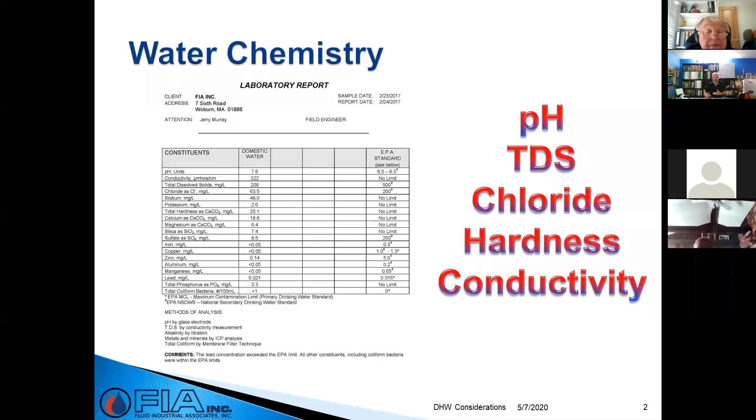Let's talk about a couple of things. So pH, we talk about pH all the time, but it's really about where we are - are we alkaline, are we acidic in our water, or are we neutral? On the heating side of things, the condensing boiler world, we're probably exposed a little more to pH because that's what we're talking about in our condensate neutralization kits. But it really talks about - high pH gives a bitter taste to the water.

That's when the EPA might say, hey, the customer's not going to be happy, the end user. And then you get buildup on your stuff. Low pH, now we can corrode and dissolve metals and other substances. What can make pH low?

Most common in heating side applications, when we see low pH, that's really degraded glycol. Obviously, because we're talking potable water today, we don't see that. Most pH is balanced really by the different water companies because they don't want high and low pH in their water pipes, so they do a pretty good job of monitoring where the pH level is. We generally like to be in that range of 7 to 8.5, maybe 7 to 9 range is where we want to keep that pH. If we cross 9, we're going to start seeing buildup. Drop below 7, we're going to start to corrode and damage our pipes. So that's pH.

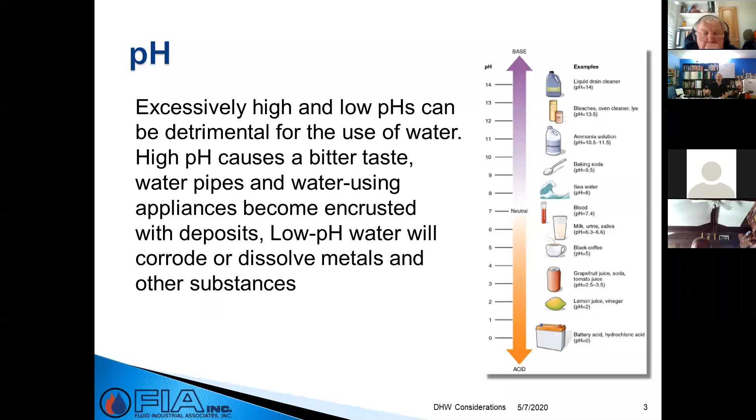Total dissolved solids, junk in your water - it's literally what it is. It is stuff that's floating around in our water, dissolved into the solution. Here's the thing that's always a weird one - we all go out and get mineral water, right? Well, maybe not all of us, but people like to drink mineral water, and that's really what that is. It notes that it's not heavy metal contamination, so we're not looking at any of those sort of things that are really harmful - the arsenics, the lead, the iron. We're just looking at different things - this could be zinc, this could be sand or dirt in the water even, any of that kind of stuff there.

Now, what that really contributes to is corrosion and scale deposits. You've got a little picture right there at the bottom. We're up in the yellow area for the most part of the New England area. So it's not bad, it's not great, but the thing about dissolved solids is when you heat water, those begin to precipitate out of solution. And then they're going to end up on the pipes.

Most dissolved solids are actually easy to take out utilizing some sort of filtration system, just a typical spun whole house type of filter. That's going to take care of your dissolved solids. So that's what those are.

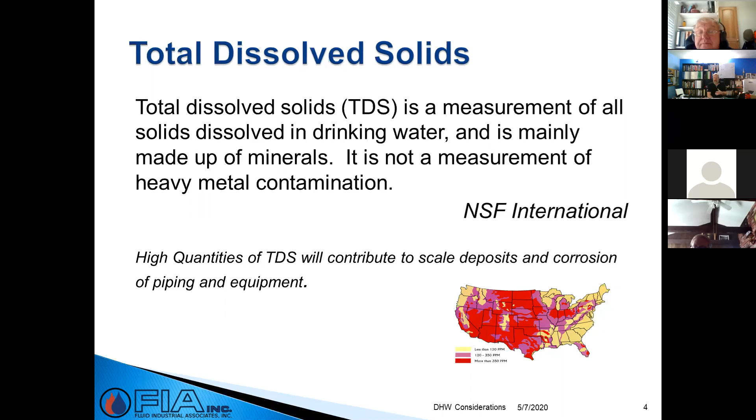Chlorides. Who knows what chlorides is? It's salt. Salt makes water more corrosive. Of course, road salt corrodes our cars. Salt is a corrosive mineral, and stainless steel doesn't like chlorides, and copper doesn't like chlorides, and those are basically what we heat with. We use those two products as a general rule.

Now here in New England, we have a lot of chlorides in our water, which is also, how do you soften water? With salt, right? We've got a water softener down there. We're going to use chlorides to soften our water. We're naturally softening the water here in New England, basically with the road salt runoff and things like that. So for heating equipment, 150 parts per million - you definitely want to have that salt content below where that is.

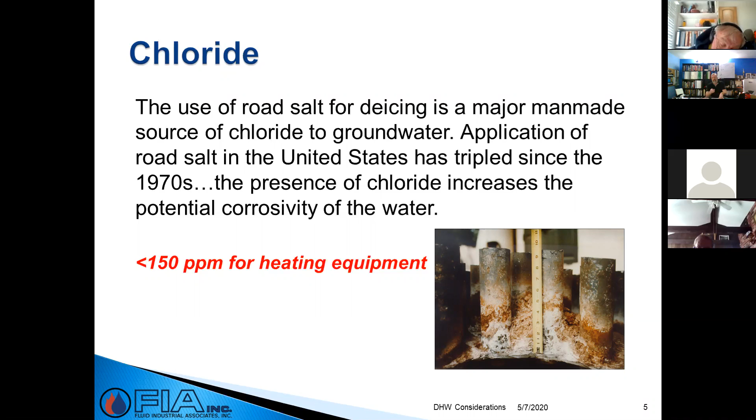So that dovetails our way right into hardness. And what is hardness? Interesting - I always thought everybody's got hard water. It's all I hear: hard water, hard water, you need to get a water softener. And then the reality is, in our area here, our water is soft. We're generally, in most places, in that too-soft area. You may see this referred to as grains per gallon or milligrams per liter - it really depends on how it's termed. That 85.5 milligrams per liter works out to about 5 grains per gallon. Coming up, I've got another slide with a little picture on there, and our whole area is in that too-soft water area.

So when water is too soft, here's what can happen: I am sucking the minerals out of the piping within the system piping. I'm going to pick that up as I'm traveling through, as the water is moving through it. It's kind of going to leach those minerals out, and it's going to carry them with it. That's kind of the thing that soft water does as it moves through and along. And water is an incredible corrosive material.

I mean, it's what it's great at - made the Grand Canyon, right? Worked its way through, wore its way down. Generally, what water is going to do - it used to do a good job of balancing itself as it moved through the water table. It was collecting minerals and doing that sort of thing, and it just got to its natural equilibrium. And then we get involved and we do all kinds of different things to our water, depending on what's going on.

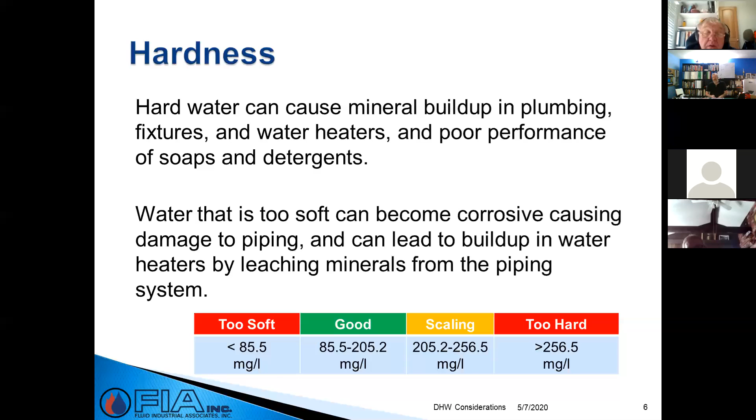That's hardness. Now conductivity, this one's getting way out there in the world of science nerdiness, so let's do some Bill Nye experiments. Conductivity is really kind of the mineral content, if you will, of the water.

Some of the mineral content in there can actually create an electrical current through different dissimilar metals with high conductivity in water, and basically we get that galvanic corrosion or electrolysis. That's going to attack joints, solder, those sort of things. It's going to get your solder joints, it's going to get all those types of things - that's really what's happening when we have that.

What's a solution for conductivity? A filter, because again, you're just filtering out minerals. We're not trying to pull out lead and those sort of things.

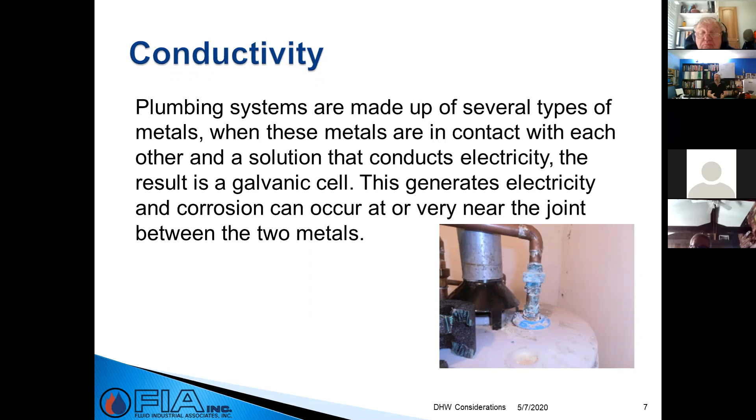And back to the soft water - that's what really created the lead issue, is the soft water moving through lead pipes, leaching lead into the water, and then making its way into the house. So that's how that was picking it up. We all understand why we can't have lead pipes anymore, we can't have lead fittings, because the water was pulling the lead out of the fittings in the pipe. It's no different - we're not pulling lead out. People don't care because it's not a health issue, but it's certainly a health issue for our heating equipment.

So, recirculation pumps. And while this seems like kind of a meandering through the woods, it's all going to tie in here. If I pass my water through my heater and I heat it up and do its thing and off it goes into the system, yeah, I'm going to chase around some of the issues - the hard water, pH, that sort of stuff.

But this is where soft water can really come into play. Now that soft water, as I recirculate it through my building, what's it doing? It's picking up all the minerals throughout the building, and then it comes back and deposits them in my water heating equipment, puts them on the surface of that, and that begins to cause that buildup on those surfaces and can lead to issues.

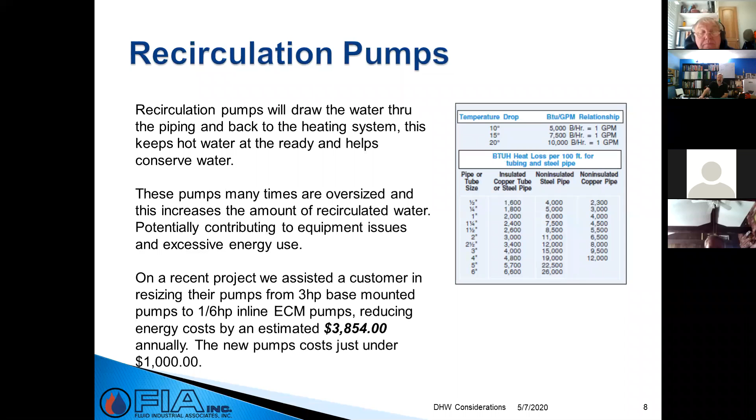So that leads me to recirculation filters. Seems ridiculous, doesn't it? The recirculation filter is installed on the recirculation line when we come back to the water heater. The picture on your left-hand side shows 2 recirculation filters that were installed—well, it's one, because they stack 2.

In that picture, those are filters that have been installed for 2 weeks in a hot water recirculation line. Think about that. The pump on those was actually a 007, so we're not talking about a ton of flow coming back there, but this is what we went from—there's the brand new ones and the ones installed for 2 weeks.

On the right hand side, you see the cartridge housing. When you're into this, just beware that your typical whole house filter might not handle the warmer temperatures—you could see 110, 120 degree water coming back to that recirc filter. So we want to size it that way.

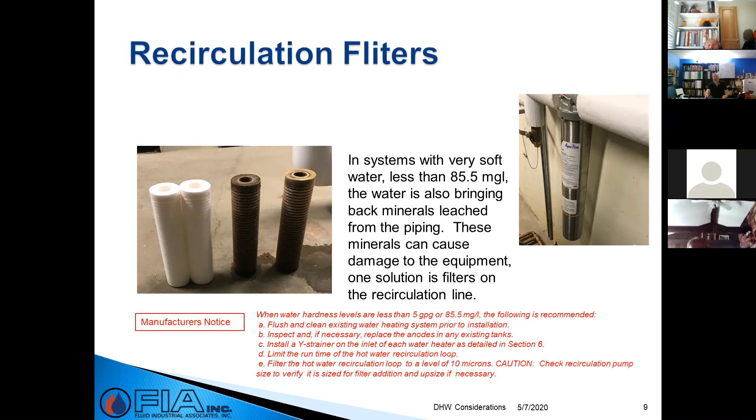As the infrastructure or population density has been increasing, we need more water. People are putting fancier bathrooms in, we're building more houses, whatever it is we're doing. There's a 150 unit apartment building going in here in my town. But we can't dig up the pipes and make bigger pipes, so the only thing we can do is increase that pressure with bigger pumps that can pump more, cranking that pressure up. Very similar to what the electric company does—they want to crank the voltage out of the transformers as much as they can, so when we all turn our air conditioners on in the summer, they're not coming out to take care of it. It's a very similar scenario.

During the day everybody's using their hot water, washing their hair, washing the cars, doing whatever—that's daytime usage. We all go to bed, some of us, and now we don't have that draw on it, and we're seeing pressure increase. In my case, my house went from 80, which was the standard, using the tattletale gauge, and spiked to 120. So that's 120 pounds of pressure I'm putting into my system at times. That's on my heating equipment, on my tank, all of that. We're increasing that system pressure, and those are all going to have impacts.

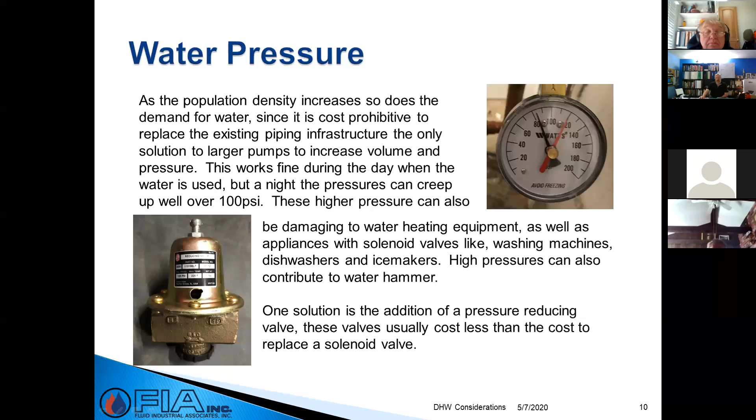Now, expansion. Water expands when heated, which never used to be an issue until backflow preventers came into play and we started putting those on. Now as our water expands, it can't go back out of the system, and I can't compress the water. So the only thing that begins to happen is my piping system or my tank is going to begin to expand, and then when I use the water, it contracts. It's going to expand and contract again.

Residentially, a 40-gallon tank or a 40-gallon indirect might have maybe 3/4 of a gallon of expansion—not a ton. Now let's step that up to a commercial application, and I've got 800 gallons of storage. Now I've got 20 gallons of expansion. Where does that go? 20 gallons of water is a lot of volume. That's where expansion tanks become important, getting those installed in the system so they can accept that expansion.

This little illustration on the side there is a little hokey, but it really shows what that expansion can do in those tanks—whether I've got that center tube through there for my water heater, and I can begin to crush that, pushing down on the bottom of my tank and up on the top. So with all these various things going on, does my relief valve start to trickle?

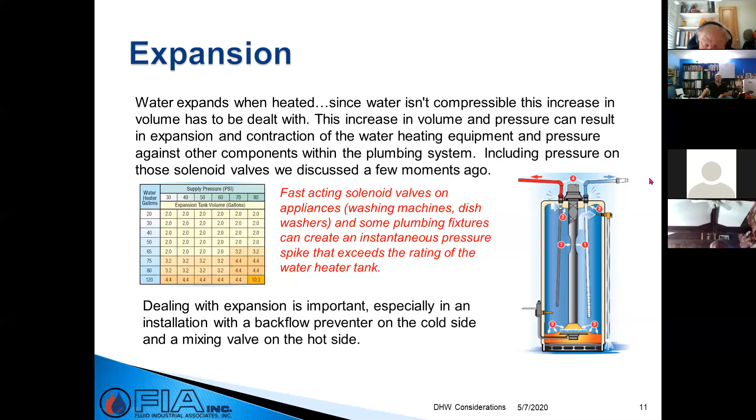All right, anti-scale filters. These are kind of a unique product and have a very specific use. What these are really good for is that one time through the system, a tankless water heater or a combi. Why it's good for that is it has the ability to—as the stuff that's going to scale up in your water heater begins to come through—it actually does some sort of, and believe me, if I could describe the chemical or electrochemical process that happens in there, I would have invented it. I would not be sitting here in my basically spare bedroom talking to you guys this morning.

I'd probably be on my own island somewhere. But it's a pretty cool chemistry thing that goes on, and as it goes through, it changes it—they become inactive, and they'll pass right through your tankless water heater or your combi, and off they go.

So I've even asked the question, well, why wouldn't we do this on a tank type water heater? Why wouldn't we do it on our split systems? Because you don't get rid of it—it stays in the system. It ends up in the tank, it does all these things, so it really defeats the purpose. This type of product is very specific to tankless and combi style units.

Good for hard water. But as you look at the picture we've got there, we're up in this soft water area. I didn't have enough room to put the whole explanation chart, but this light gray area is that extremely soft water area—that's us. But you could be, if you're pulling off of a well, you could certainly have some hard water.

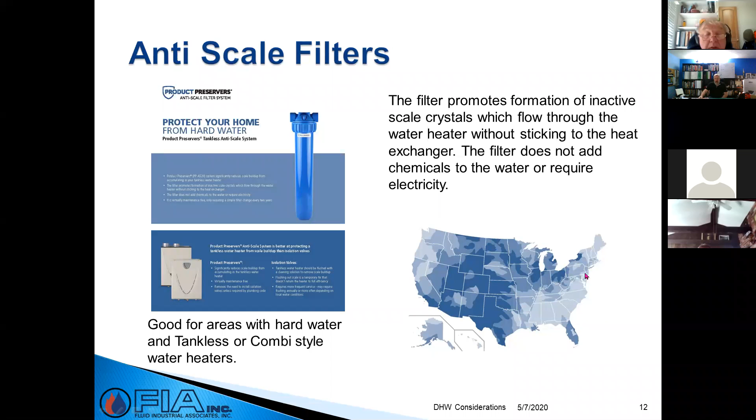All right, so what happens to water when heated? That's why you guys came, right? And I've given you all these horror stories of water's terrible—you should stop drinking it and stop taking showers, and really the world will be perfect.

So water does get more corrosive as we heat it, and it's all this water chemistry that's going to come into play. From 60 to 140 degrees, we're quadrupling the rate of corrosion that's created. This galvanic corrosion increases as the water temperature goes up, and the minerals come out of solution. Once we go above 140 degrees, we're going to double our corrosion effects every 20 degrees of storage. So 140 is really that area where you want to stay away from if you can. Really, the challenge is for some of the bacterial things, they want us to be above 140 degrees. So it becomes this balance of really where we're looking and what we're doing there. But just keep that in mind: the hotter you're heating your water, the more corrosive, the more of these effects that you're going to have.

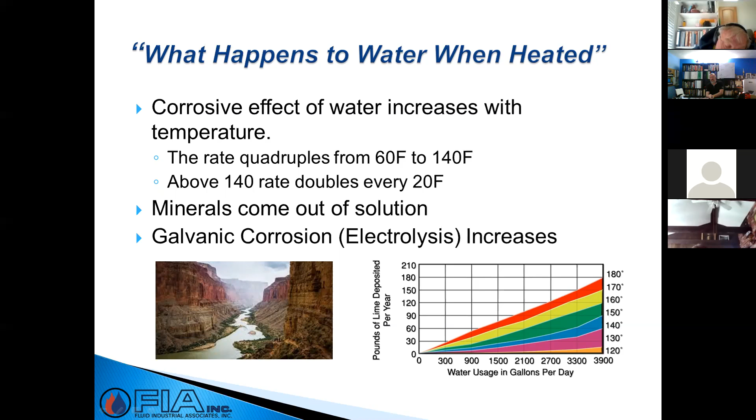All right, so all the bad things. How much hot water do you need? The answer is it depends, right? You could have two houses side by side that are going to have completely different domestic hot water characteristics. Could have two 3-bedroom, 2-bath ranches—one with husband, wife, young child—not a lot of usage.

15 years down the road, husband, wife, 3 kids, we've definitely increased the usage within there. So it's always looking at what's there, what's going on, what are the fixtures.

From time to time, we'll get a request sizing, hey, I got 2 bathrooms, we got a tub and washer and dryer. And then it's 2 bathrooms with fancy showers drawing 20 gallons a minute and an 80-gallon soaking tub. That's a pretty substantial domestic hot water load.

So it's getting a little more information as we go. We talk about restaurants - they tend to have a continuous load and then a dump load. When we look at restaurants, it's how many of the slop sinks, wash sinks, and prep sinks do they have? Because generally what they do is fill 3 of these 18-gallon sinks simultaneously with the hottest water they can dump into it, use them, drain them all at the same time, and then fill them all again. Well, I'm rapidly using 60 to 80 gallons. Right now I'm going to fill those things, and can probably fill them in 7 to 10 minutes because we're doing it in 3 sinks. That's a big dump load going on your system.

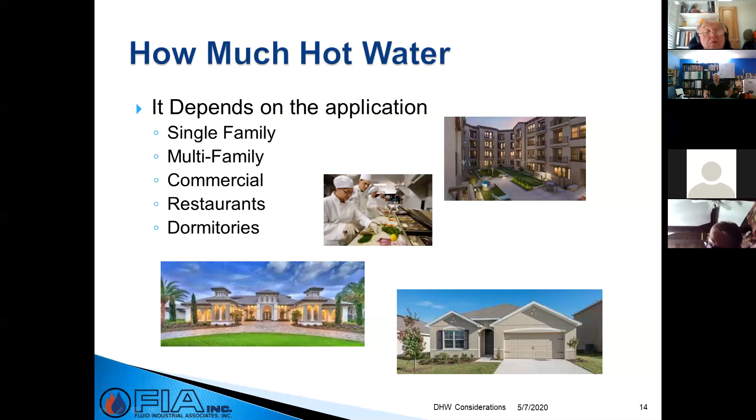So what are our first hour needs of the system? First hour is basing it on what is my storage and dump capacity coupled with my continuous recovery of my water heater. Now, that sounds like that should be really easy, and I'm going to show you a slide here in just a minute that's going to explain why that's not so easy to figure out.

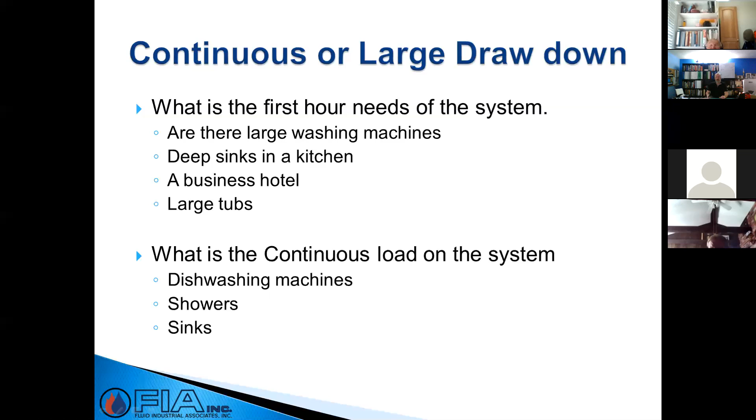The other thing about residential - in FIA's territory, we cover ski resorts and we cover beaches, and a lot of normal stuff too, but ski resorts and beaches have particular types of uses. If I go down to the Cape and I have a house on the Cape and I invite 15 friends to come down, we're going to go to the beach, we're going to have a party, we're going to do whatever.

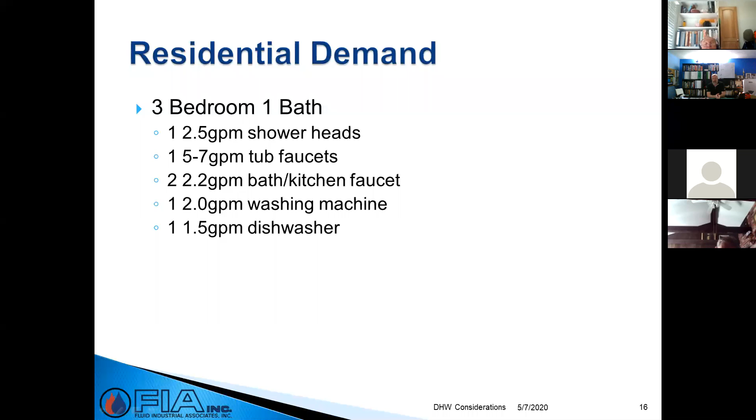At the end of the day, all 15 people come back to the house and take turns taking showers. I'm going to get a very long, continuous demand in those scenarios, so I have to be prepared for that. I can see the same thing up in a ski resort. Anywhere you've got these kind of vacation spots, or a hotel that specifically caters to weddings, you have the same thing. All the guests go out, do their thing, then come back and all take showers and get ready for the event. So always try to know what's the use of this building. That's going to give you a lot of inclination as to what's going on and what you do.

How about a multifamily demand? Used to be we had to do everything by hand and calculate it out. Some of the boiler manufacturers, Lochinvar included, put out these great charts with how to do the math: this many apartments, you're going to do this, here's your diversity factor. If you got on early, you heard Tom Gaudette and I talking about this scenario, where we also factored in our diversity factor, the assumption that everybody wasn't taking a shower at the same time. We were talking about how many people are home all day now, and whether we're seeing these heavy loads on some domestic hot water systems. Luckily, I haven't had any calls, so that's certainly a plus.

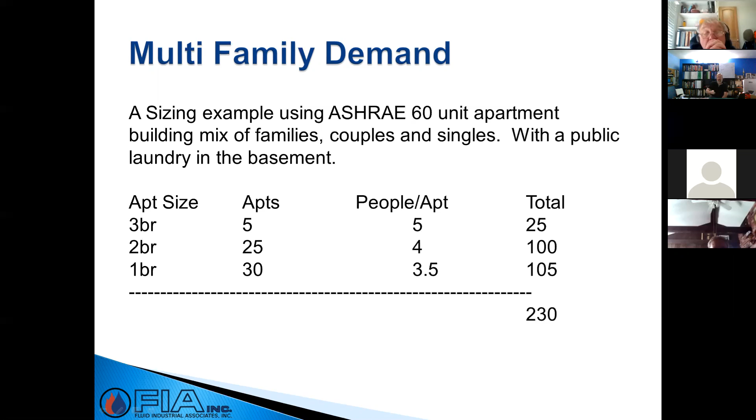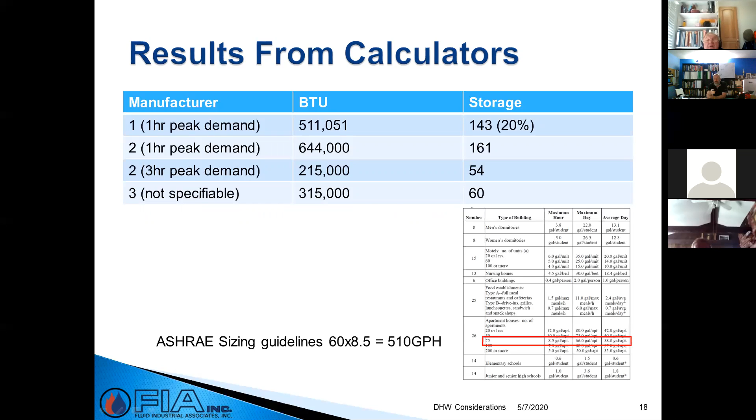If I use the ASHRAE sizing guideline, for 60 units, they figure 8.5 gallons per hour per unit, giving me 510 gallons per hour. So now my first example has BTU and storage, now I have gallons per hour - where do I take that? You take the number of gallons times the weight of the water times the degree of rise you're looking for. In this case, we're looking at a 40 to 140 degree rise in temperature, and I did this to match the calculations from those manufacturers' calculators. This only gives me my BTUs, and those BTUs are assuming I've got some storage with it. So that gets calculated out.

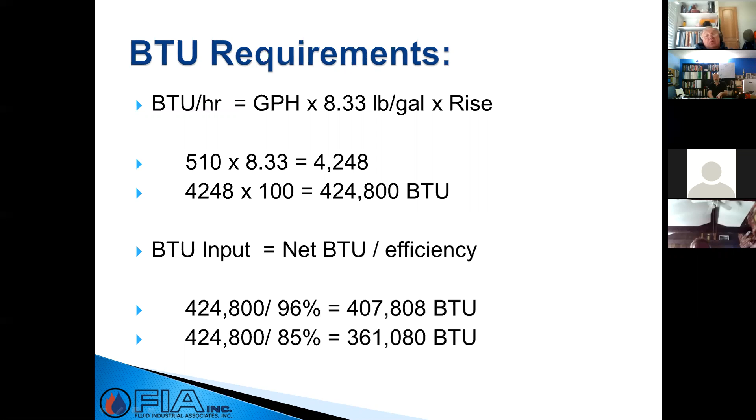And then you follow on with: do I want redundancy? What do I want, how do I want to size it? So I'm not trying to make it more difficult, but there is just a ton of stuff that goes into calculating a domestic hot water system and what you're going to select for equipment in there.

Now, I hear this conversation a lot, that brand X is more efficient than brand Y at heating the water. Just be cautious when those claims get made. BTUs to heat water are BTUs to heat water - end of the day, if I heat 100 gallons of water, I'm going to need the same amount of net BTUs no matter what piece of equipment I use. The difference is, how do I get to my net BTUs - the net BTUs that I'm going to put into the water to raise that water temperature.

If we look at the surface of it, thermal efficiency is the big thing. If I took a 95% efficient tankless water heater and an 80% efficient tank-type water heater, the difference is that efficiency - that's the difference in how many gross inputted BTUs I'm going to use to get a net output. Hopefully that makes sense. So when I'm talking about my flame, that's the difference: gross, input, net output.

And we're looking at burner efficiency right there. What else is going to impact me? Well, what am I now using to transfer the energy to the water? That's kind of the next piece of that puzzle when we start talking about a system's efficiency.

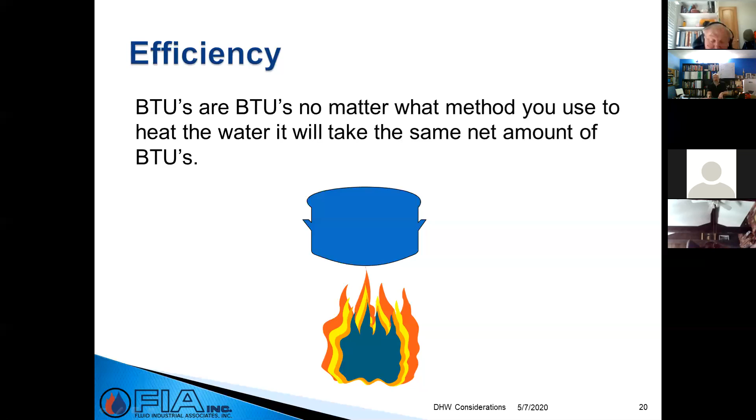So we're going to start with, not going to good, better, best. This is a tankless or a combi unit. I'm going to directly heat the water on demand. That's what I'm doing. So whatever my net BTUs are, burner efficiency to net, goes into my water. That's pretty simple, right? That's what I get. If I net out 95% efficiency from those BTUs, that's what I'm putting into the water.

Just some things to consider when we talk about tankless and combi units: they are directly fired. That's where we see some of our scaling issues. If you miss on a tankless, an instantaneous unit, its capacity is its capacity. It's going to be sized by the temperature rise in gallons per minute. That's all it can do.

So if we size it out and say I'm getting 4.8 gallons a minute at a 77-degree temperature rise, that is what it is. If you need an 80-degree temperature rise, you're going to get less gallons per minute. If you need more gallons per minute, you will get less temperature rise. So hopefully if I put 6 gallons a minute through it, I'm not going to get a 77-degree rise. That might work okay if I'm in Arizona with warmer groundwater temperature. It might not be so hot if I'm up in Caribou, Maine. So again, just considerations to take into place. You can't turn the water temperature up any more than what it's going to give you in those.

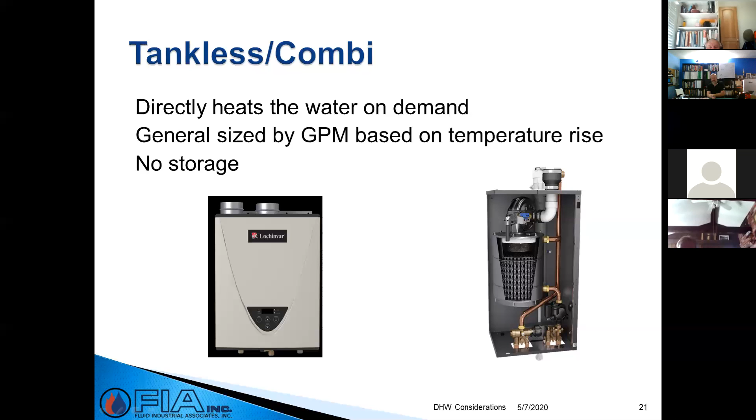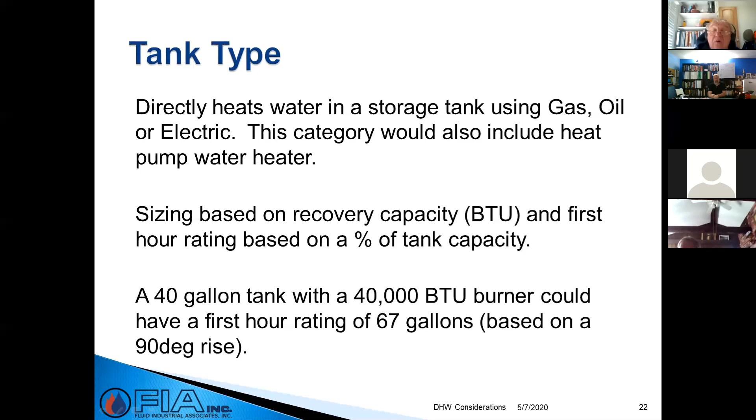Tank types are on everybody's shelf. You go buy one, put one in. If it fails, take it out, go put another one in. How about a split system?

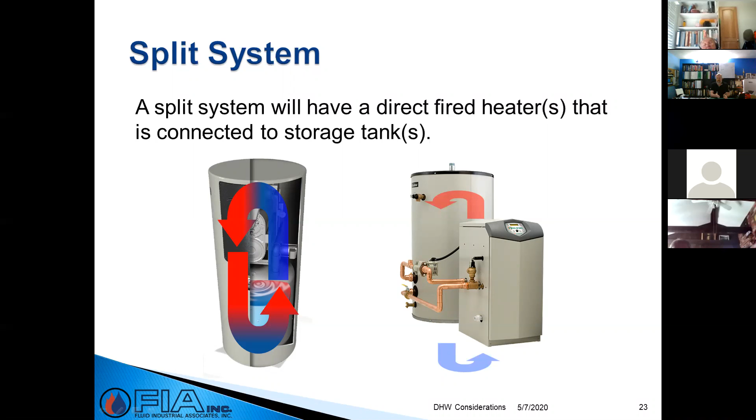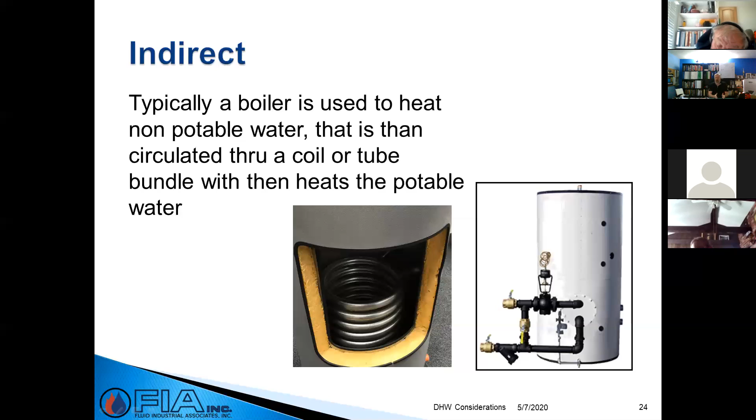So like I said, there's no one size fits all domestic hot water solution. How about questions?